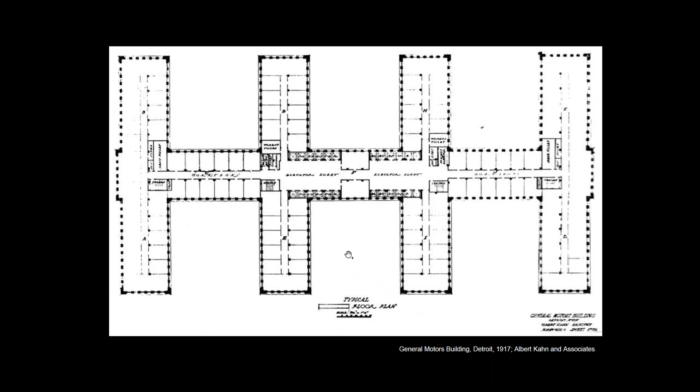So the point being is that the architect and the lighting designers are creating a condition where the building organization is developed around the pattern and need of light in the space, and your sequence of movement in there amplifies your perception of brightness in spaces where you're trying to get that effect.

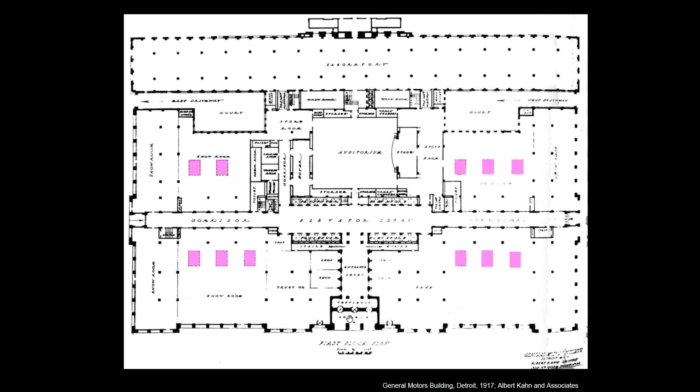Going forward into the future, what we've seen is a real bifurcation, going from the 50s into the late 90s and even beyond, where there's not a real strong connection between the space making exercise of the architects and the enclosure design, and the lighting designer and engineers' work, which is to essentially provide foot candles in a lot of ways to make the space functional for whatever tasks it's designed for.

So we start to see where architects see their responsibility for using daylight and shaping their buildings to light spaces, and lighting designers and engineers really aren't thinking about the presence of daylight as part of their lighting scenes, and these things start going in parallel paths, creating buildings that don't really respond to daylight.

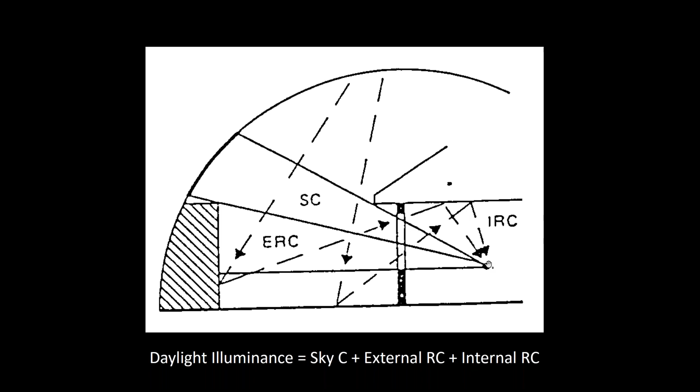The second thing we have is the external reflected component. So that's objects in daylight on the outside bouncing light back to that point. And the third thing is what I call the IRC, the internal reflected component. That's the effect of the interior surface finishes, the shape of the apertures, the furniture, etc., all contributing to how much light is in that point.

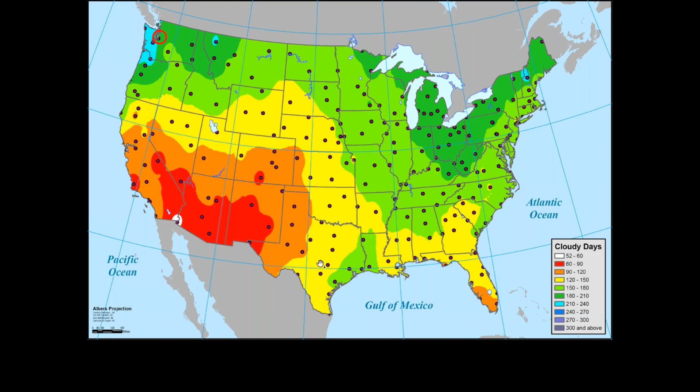So if you're designing for daylighting, the first thing you want to do is make sure your space works under overcast sky conditions, and then secondarily design around controlling direct sun. It's the exact opposite once you get into this part of the country, where we have much more clear days than we have cloudy days, where we want to design our illuminance in the clear sky, and then do the best we can to make it work on overcast days. So that's about setting priorities.

And as a daylighting designer or an architect or somebody trying to deal with sun control, low angle sun is inherently problematic, because that's what gets deep into the space. It gets into our eyes, it causes glare, can cause overheating, and can certainly provide for visual discomfort and overlighting.

But when we look to the south, we can see that the sun is in a fairly fixed position of the sky, right? It stays in a pretty consistent part of the sky over the course of the day. And then on the north side, we have very limited direct beam sunlight during typical occupied times. So those facts about the relationship between the sun and the earth give us some tools that we can use to design effective daylight in buildings.

And just to recap that, I'm going to show a quick video. Can everybody see my QuickTime video on screen? Yeah? Hope so. Showing, yep. Yep. Okay.

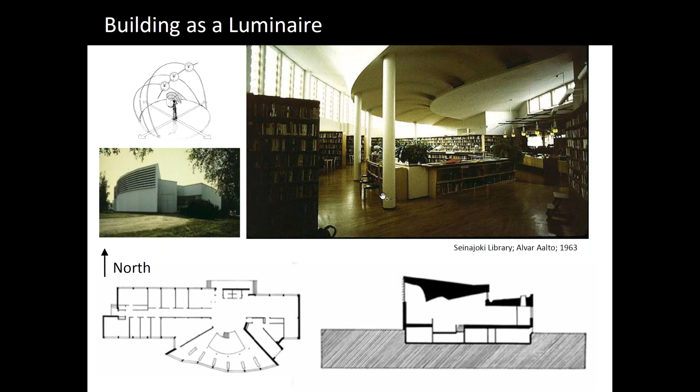And I think intentionally kind of peels back this in a concave way so that there's deliberate brightness in this part of the ceiling plane that by contrast makes this surface seem brighter and this surface seem brighter. So really this building is shaped around taking direct beam sunlight and turning it into functional diffuse daylighting that's appropriate for the library tasks that are happening.

So anybody have questions on that, sort of shaping buildings around the sky as a light source? No written questions, Chris, and you're still sounding good.

Good. So we're about halfway through, and I wanted to talk about some basic rules of thumb that you can use or think about when you're designing control zones. I know some of that is mandated by code descriptions of diffuse daylighting, but I think when we're thinking coherent lighting scenes, sometimes we have to scratch the surface a little bit deeper.

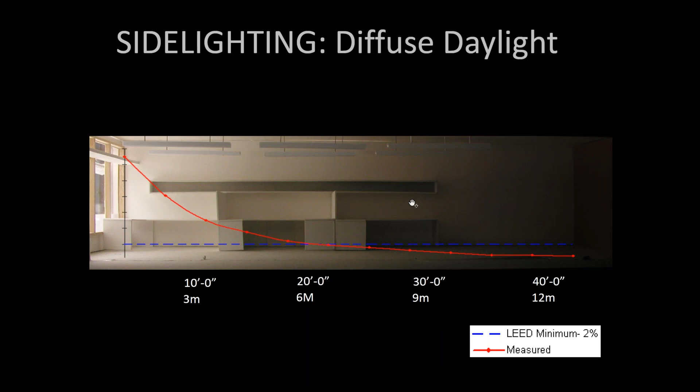We also see the effect of vertical obstructions creating deep shadows in the space because our light is essentially traveling almost entirely horizontally, which can be effective, but is very subject to any obstructions in the vertical direction radically changing it. You can see how this partition, the window side of it, really starts to pick up that brightness and collect it there and cast shadows again deeper into the space.

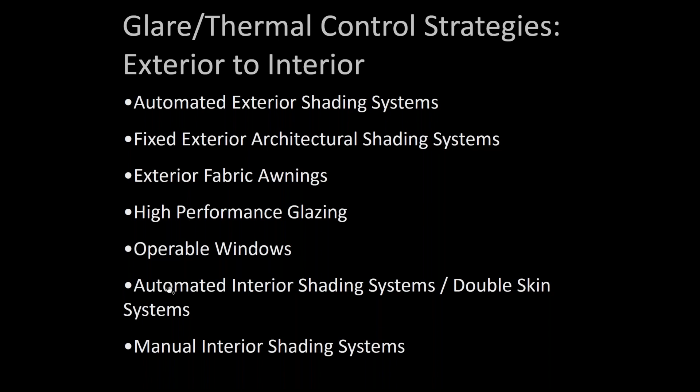So one strategy I really like that has some uptake here in the Pacific Northwest is automated exterior blinds. And we see those in some countries, especially in Europe, where there's not a widespread use of mechanical cooling. And one of the reasons we've seen uptake of this in the Pacific Northwest is that with automated exterior Venetian blinds, you can essentially eliminate cooling while still providing comfort in Pacific Northwest buildings because our climate is so mild.

But essentially what automated blinds do is they provide 100% sun control and glare control on days when it's clear and when sun is present on that side of the building. They're essentially pre-programmed, and a photo sensor decides, is it sunny or is it cloudy? And if it's clear, the shades deploy to the slat angle that maximizes daylight distribution while minimizing or eliminating sun penetration either onto the windows or into the space. And then when it's cloudy, they fully retract and maximize the amount of diffuse daylight into the space.

So from a performance standpoint, dynamic systems, and this would include, for example, electrochromic windows or interior shades, really give you the best of both worlds in terms of sun control with maximizing diffuse daylight in conditions where sun is not present. Another strategy.

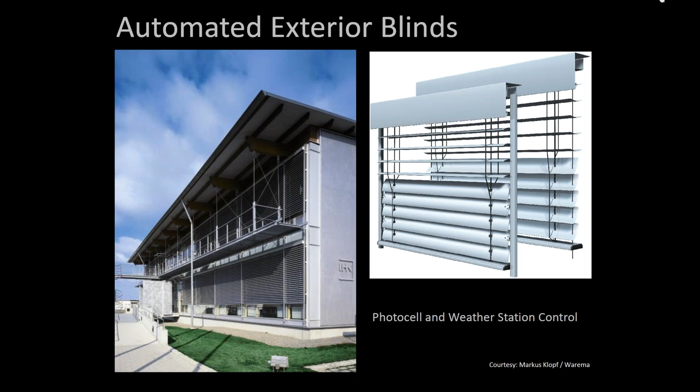We'll have to wait to see what Dan says, but that was a great response, Chris. Thank you. Yep, thanks. And thanks for the question, I appreciate it.

So especially in lower latitudes and especially in south-facing windows, fixed architectural shading can be very, very effective, especially during times of year when buildings are likely to be in cooling mode.

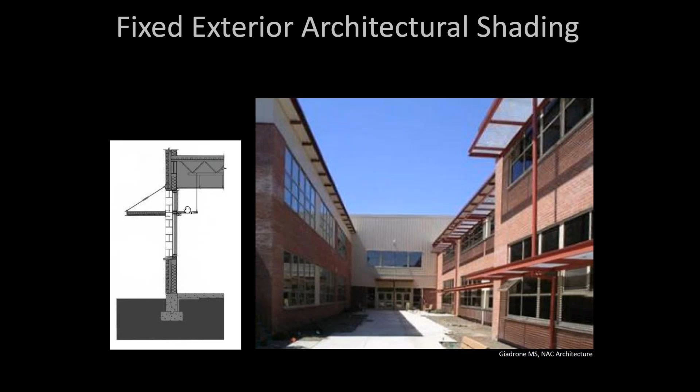So when we're thinking about daylighting, a really important piece of that puzzle is glass and glass properties. And the main attributes of glass that we care about are visible light transmittance, obviously, how much of the visible light in the sky and in the spectrum, the electromagnetic wavelengths that are making it down to our building, how much of that is coming through this, entering the space, and that can be anywhere from 10% to about 70 to 80% in typical double glass. Generally, for daylight glass, we're looking at low E glazing in the 60 to 65% range.

Additionally, we're interested in the solar heat gain coefficient. Most of our commercial type buildings are in cooling mode or want to manage their peak cooling loads. And the solar heat gain coefficient of a piece of glass is a good way to start doing that. And we're generally trying to eliminate or block the sun's solar radiation while admitting the visible light.

And then the third thing we want to think about is how much radiant heat transfer can we inhibit. We want to try to keep the heat in the winter and keep the heat out in the summer, and a low U value is reflective of a piece of glass that inhibits that.

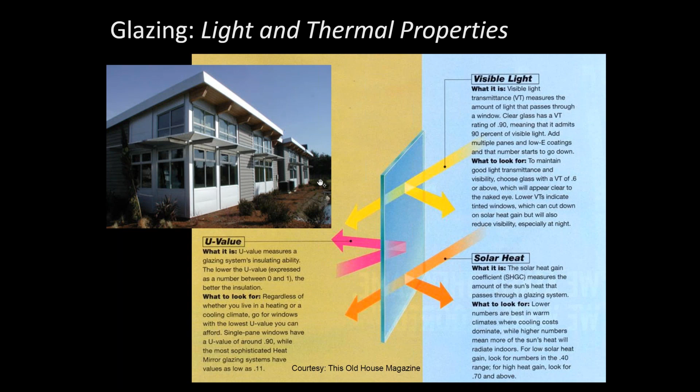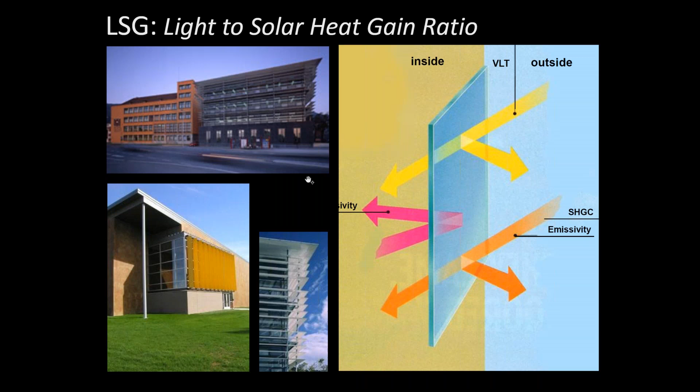And generally, we're using what's called spectrally selective glass, and a term that's used to characterize that is the LSG, or the light to solar heat gain ratio. So what percentage of solar heat to light can we admit? And generally a 2-to-1 is about where we want to be. So we want to be able to admit twice as much light to the amount of solar heat that we're admitting with our glass.

So we talked a little bit about side lighting strategies or window lighting strategies. Any questions? Again, the big thing to take away is you've got a couple of daylight zones, one about 1 times the head height of the window, the second one about 2 times the head height of the window, and after that, no more daylight. So if you want to have a comprehensively lit space beyond that, we have to think about skylights or top lighting strategies.

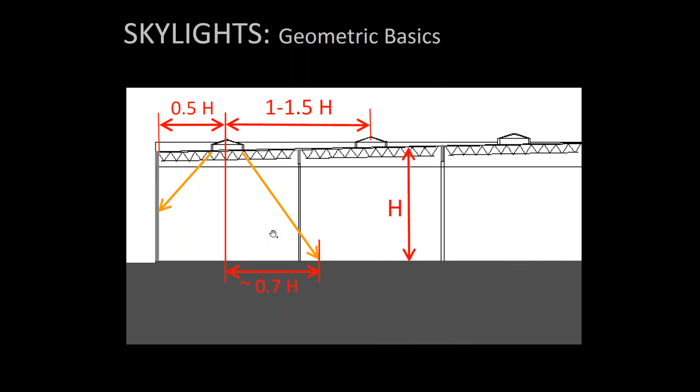We peak or optimize around 3% to 4% as the target for our skylight to floor area ratio. However, in places like Seattle or Portland, west of the Cascades, I like to shoot for around 5 to 7%. I actually give back a little bit of efficiency to get higher quality and a better sense of brightness in our distribution of light. My rule of thumb is 3% of the floor area for sunny climates and 5 to 7 for overcast climates.

What we'll often find in energy simulation is that our best quality daylight may not be coincident with our optimization of energy, but we're still saving significant energy, even though we're giving a little bit back to make sure we have a very high quality space. The most important thing to think about when designing for top lighting, overhead lighting or skylights is the employment of light diffusion.

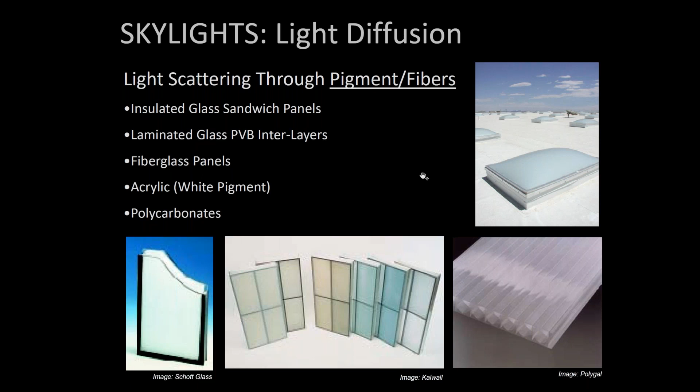Another strategy is using light diffusion through refraction, and that can happen through, in this case, the dome of a solar tube, or refraction through a highly reflective tube. Those of you who've been in the classroom in the lighting design lab have seen these in action. Or we can see this through prismatics. So many of you will be familiar with prismatic lenses for luminaires, but we also see that in skylights. There's a company called Sunoptics that focuses on prismatic diffusion of skylights.

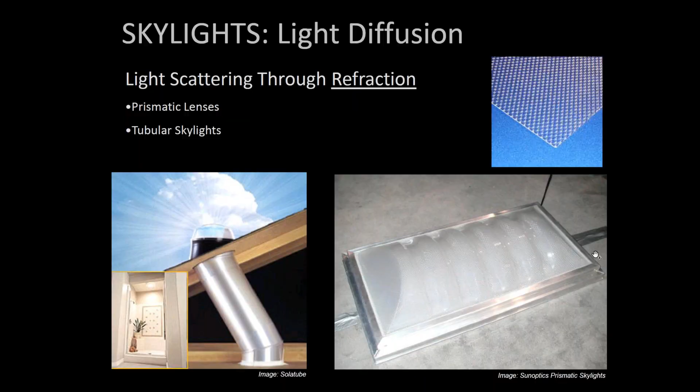So any questions on top lighting and side lighting? I'm just really scratching the surface of these two approaches, but you know, you kind of put these pieces together and that's how you get a well daylit building.

All right. No other questions that came in, but yeah, sounding good, Chris.

Okay. So here's a project that really, I think, does a great job of putting all of those pieces together. This is a building down in Federal Way, designed by Weinstein A|U, the architecture firm here in Seattle. And it consists of a high bay gym surrounded by sort of classroom size game rooms and learning lodges. And it really uses light in a beautiful way to, one, fill the gym with diffuse daylight, really wash the walls and light the vertical surfaces, which is the main thing that you see when you're in the space.

And then some selective cuts here on the perimeter of the gym on the outside to light the inside wall of the gym. So we're really lighting both sides of these walls and then bringing light in from the perimeter over here. So let's take a look and see how that works. So first thing you do is you walk into the space. There's this beautiful transparent skylight that lets in a little bit of direct sun here, and provides some visual excitement. And all the electric lights are off in this image, which to me is really impressive.

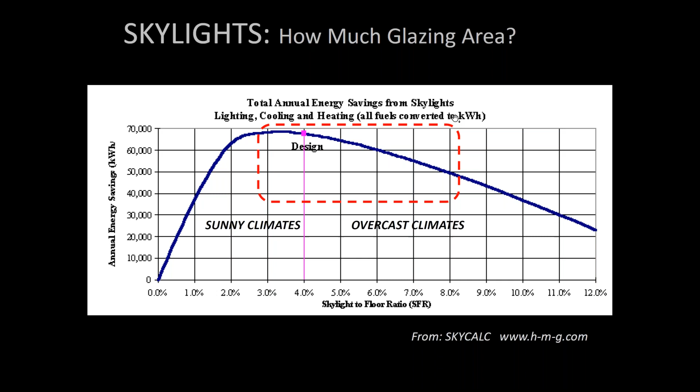Some of the assumptions in here are older. I think the lighting power densities were like 1 watt per square foot. So some of the cooling penalties will be a little bit less, and some of the heating penalties will be a little bit more than a facility today. But yes, absolutely. In the tool, there's a pull down menu and you can pick warehouse or office or what have you. And the savings would change based on that, based on internal loads, and also would change if you were able to change the skylight to a higher performing glass skylight, which is generally what I recommend today.

That was a great question though. That's another topic that you can go quite deep into, looking at the trade-off. And as I said, a lot of times I'm maybe not going to take the most optimal energy savings if it means having to sacrifice some of the space quality stuff. Obviously, I'm not going to create spaces that have significant energy penalties to make the daylight work. But I might take a little bit of a hit on the energy side, maybe not fully max it out, if it means improving the quality significantly. So those are all value judgments you have to make in the design process.

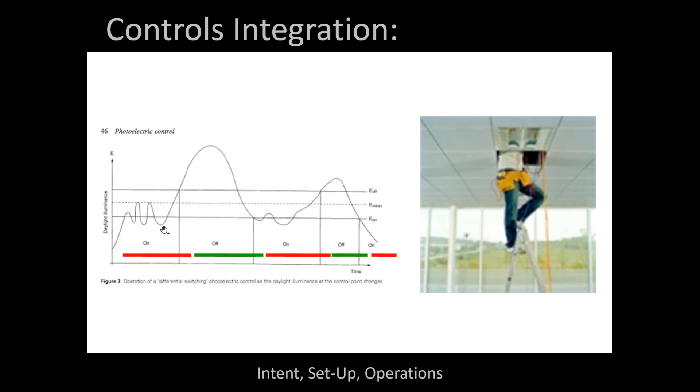Learning about controls integration. In the past, we used to have on-off switching, which would cause people to get up on ladders and disconnect things or put Dixie cups over the sensors. Now we have nice, smooth, continuous dimming that's essentially transparent to the occupant. These are some key components: the window, the sensor, the controller, a dimming ballast, and a fixture. With luminaire level lighting controls, to make it really simple, all of that is onboard, embedded, and essentially ready to go out of the box. And LDL has great classes on next-gen lighting controls of all sorts. So I'm going to jump over that and get into some tools and resources so that we have some time for questions.

Hey Chris, speaking of questions, could we take another one real quick? Yeah, let's do it. Okay, awesome. Question coming in from Jenny. Is the amount of foot candles in a space significantly different when using translucent skylights as opposed to transparent?

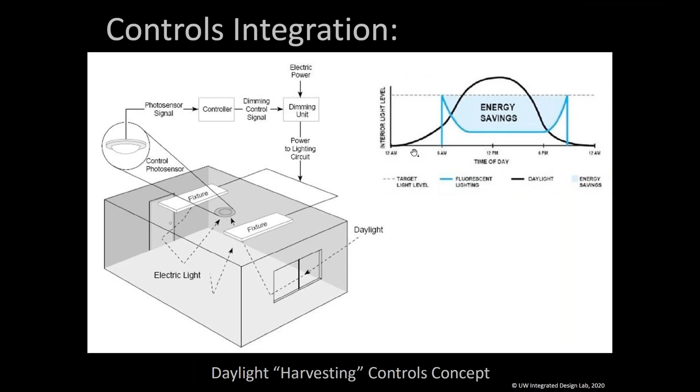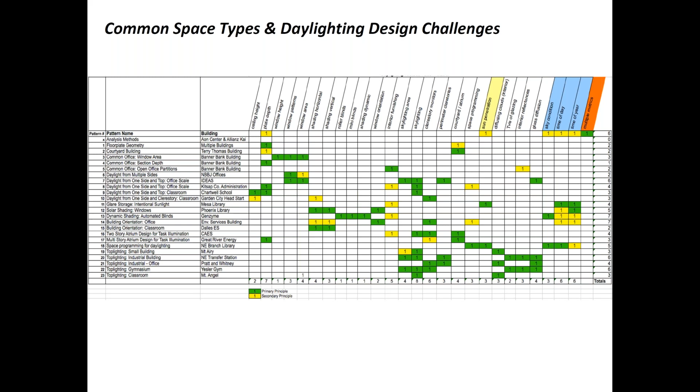So let's talk about some resources. So I've worked with the University of Idaho to build a tool called the Daylighting Pattern Guide. And that tool essentially takes what I think are the top roughly 20 daylighting conditions you might experience when designing a building, and steps through some common simulation scenarios that architects and engineers might come up with. And it's drawn from buildings over a wide geographic and climate diversity.

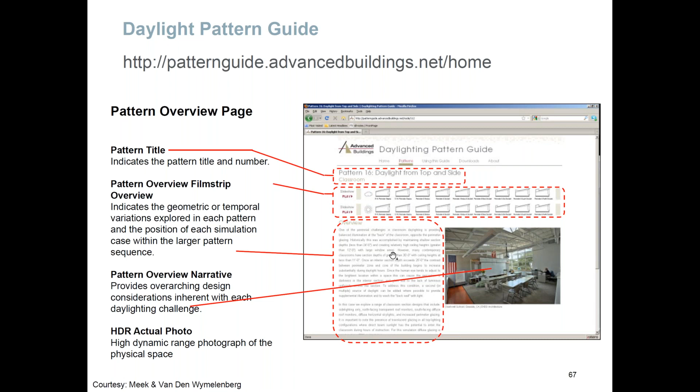And it's a free website. You can go online. You have to register, but you never get any spam or emails from it. They're just tracking usage on it to see that it gets used and people think it's valuable. And what it does is it describes the pattern of the daylight scenario, and then it steps through a series of narrated conditions that you might design to, and provides photometric and luminance-based feedback on the different designs.

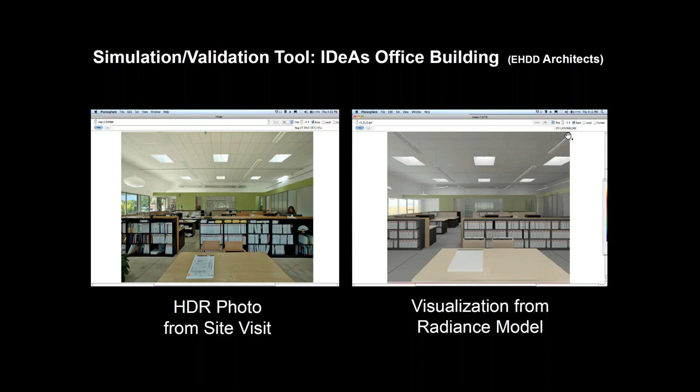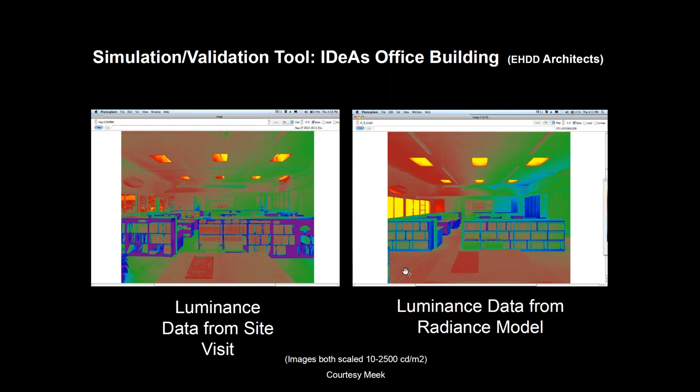And what we did was we documented physical spaces that were deemed really good daylighting designs using the simulation tool Radiance to create essentially a calibrated model. And then this is false color data from our calibrated model and the actual site visit. And then it steps through from not being very good, from not enough windows or not enough apertures, to having too many. And this is a classroom.

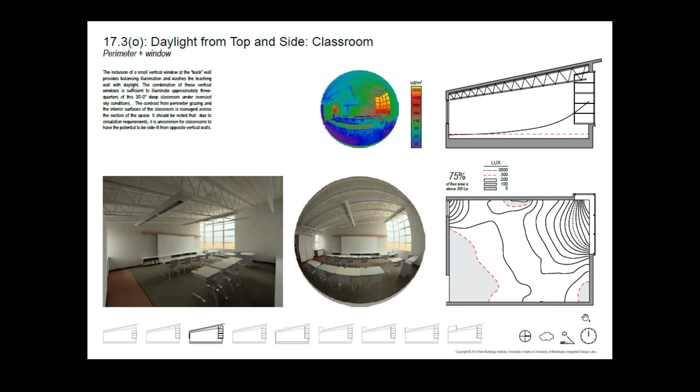So for example, if we have a really small corner window here, about a quarter of our classroom is lit. And we increase the ceiling height of that, and it bumps up to about half the classroom. And then we put a window in the back, it starts to fill in. And then we add some skylights, and we have a near 100% daylit classroom. And you can just sort of see how this goes from a dark space to a brighter space to, in some cases, an overlit space. So here's some different clerestory geometries.

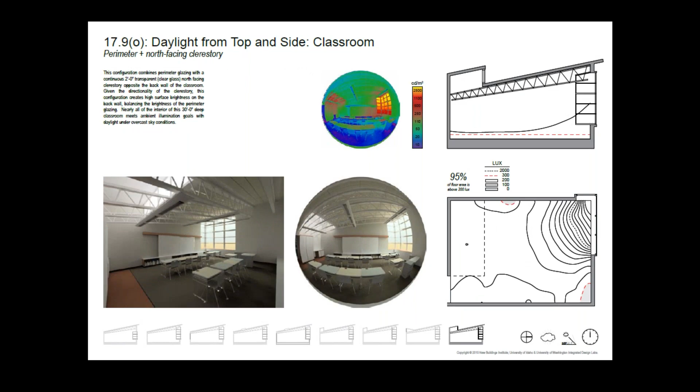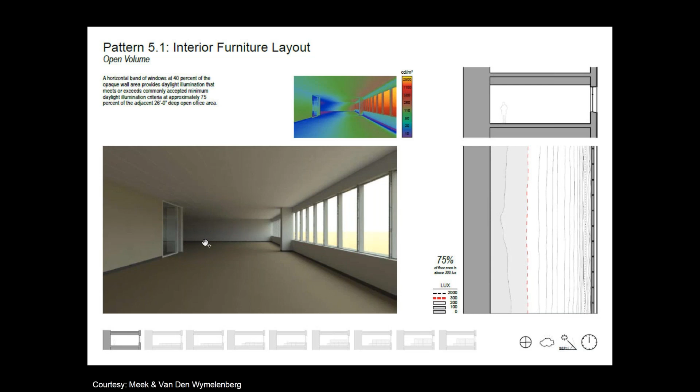Here's another pattern that shows the impact of interior furniture design. So we've got an architectural space. It's pretty well daylit. If you simulate it, the green is good. The line of green is good. The blue is starting to get a little bit too dark. And we've got a pretty well daylit space, a nice green bright wash on the ceiling, good back wall vertical surface brightness to balance the section, and everything looks pretty good. Our horizontal illuminance drops below 300 lux about here, but that's the corridor in the back of the space.

So if we add furniture in it and just some sort of basic collaboration style desks, we don't impact the daylight at all. When we add modesty panels, also not too bad, but our acoustics maybe aren't good, our privacy isn't all that great. So if we add 42-inch partitions, we start to get a reduction in light levels, but we're still about 100% daylit in the workstation zone. When we get up into vertical partitions that are perpendicular to the window, we start losing a little bit, right? We come back and just about half of the workstations are daylit.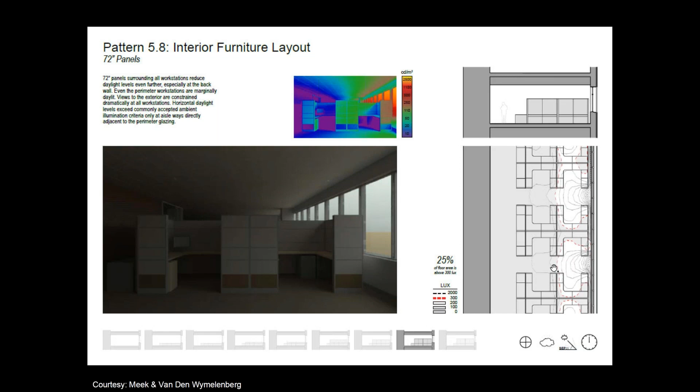When we go higher, the back of our space starts to get dark. Now we're talking about a real cave type environment. And if we go up to 6-foot partitions, those are at 72 inches, essentially we've got a space where a little tiny bit of the aisleways are lit and the rest of the space is quite dark. And maybe we can pull that back by doing some glass partitions or something like that.

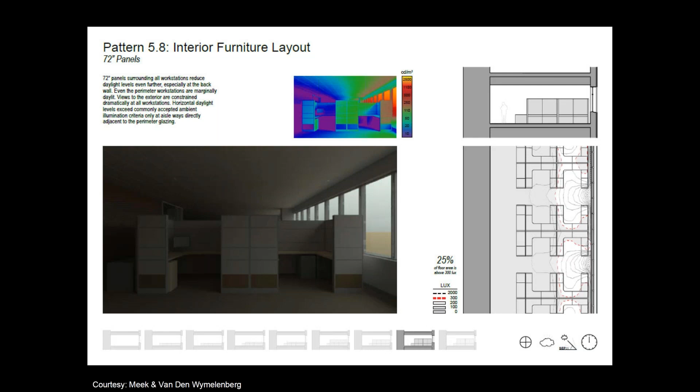But the point being is we haven't changed the architecture at all, but as the interior furniture and partition design starts to encroach more and more on the space, we start to lose our daylighting effect. So thinking about how our interior design decisions impact our daylight distribution.

And so there's tons of different patterns like that. And I'd encourage you to explore that if you're interested in sort of a narrative simulation-based guidance on daylighting design and likely probabilities of success of different design options. And it's got classrooms and offices and high bay, it's got warehouse, it's got gyms, it's got a whole bunch of different building type configurations that you might be thinking about.

So the last thing I want to point to is some IES resources that I think are really good. I was part of a podcast series, and I think these are still freely downloadable from the IES. I did these with Matthew Tanteri and one of my colleagues, Kevin Van Den Wymelenberg at the University of Oregon. There's a daylighting seminar that gets put on by the LDL here every couple of years.

There's an RP-5, which is recommended practice for building daylighting. There's the daylighting metrics, spatial daylight autonomy and annual sunlight exposure, if you want to get into the weeds about simulation and simulation metrics. And obviously the lighting handbook is a great resource for daylighting and establishing lighting design criteria, as well as the handout on controls.